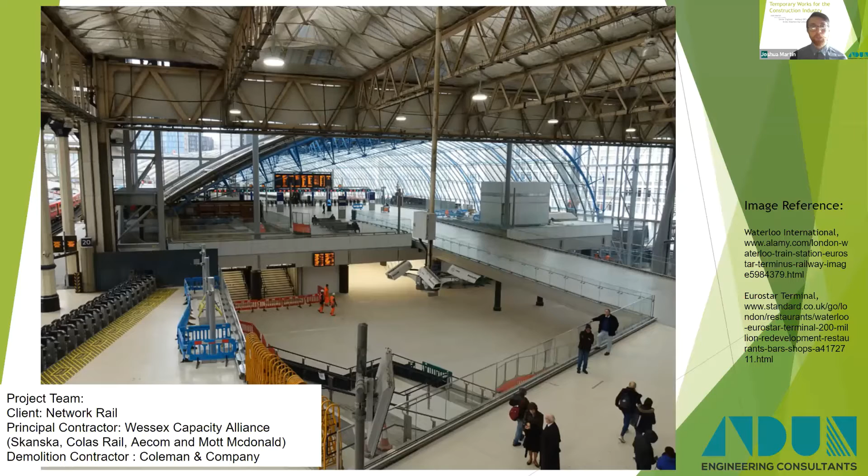The main package of works at Waterloo was in the removal of a large steel truss bridge, which you can see in this photo here, which was taken during the middle of the project, really. And also the demolition of the track support structure that was behind. The aim of the scheme was to remove the structure that used to serve the long Eurostar trains, now that the Eurostar had been moved to St Pancras Station. So effectively the platforms that are very long that you can see going off into the distance under that archway

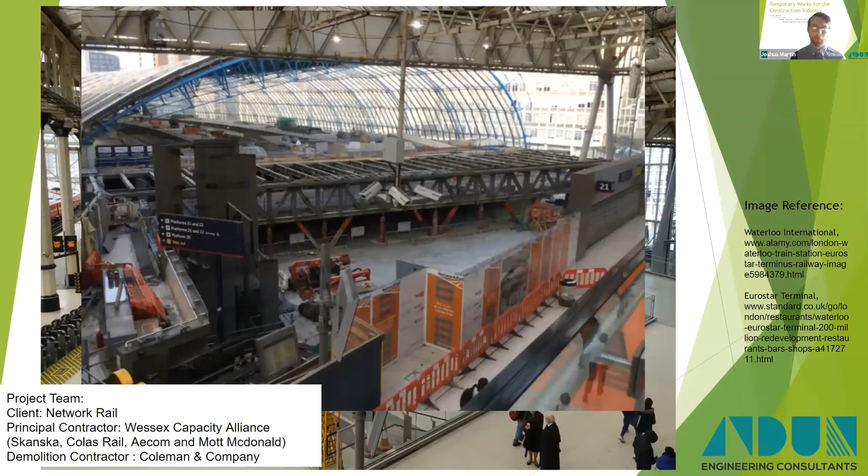could be shortened. It included the removal of around 2,000 tonnes of concrete over about a 15-month programme, all carried out within a live station over the top of the station's underground station. The Bakerloo ticket hall was just under departures level, which is directly under those props that you can see under the front truss. The package was completed on time and with zero RIDDORs.

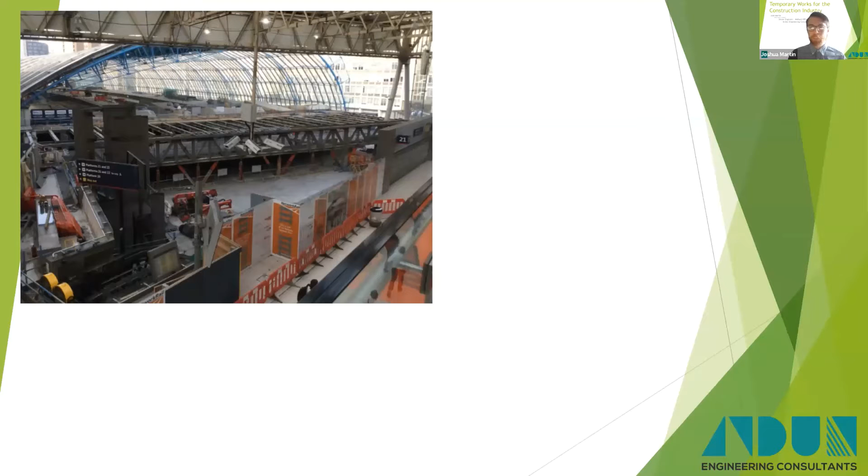So the first task was the bridge. First propping was installed to the bottom chord of the front truss, which you can see on that photo there. This enabled the truss to be dismantled, but more cleverly allowed plant to operate on top of the deck, as opposed to operating on top of departures level, which was directly above the live Bakerloo ticket hall. This ticket hall was a key risk that influenced a number of the demolition methods and thus the temporary works on the job.

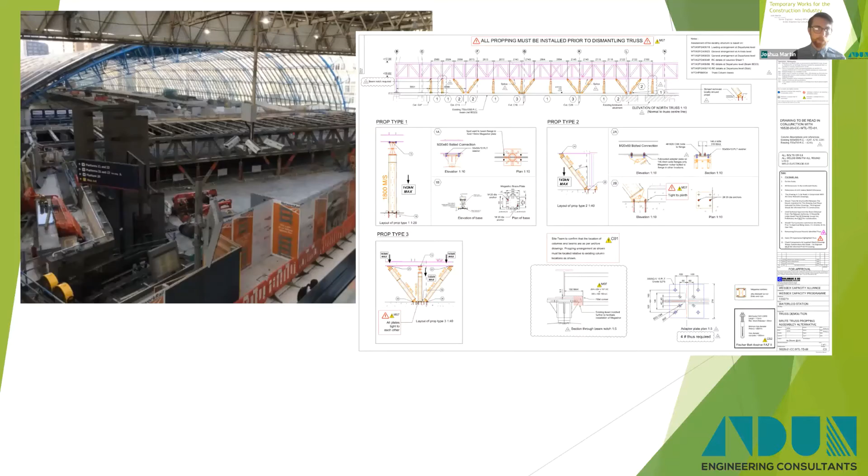All the risks were communicated to the contractor via drawings, a bit like this one, which shows the mega shore, and step-by-step sequences were provided as well, just so that we could communicate the exact step-by-step sequence of how we envisaged the structure would be dismantled safely. These designs were produced collaboratively with the demolition contractor and the principal contractor. I made the effort to share concept design work as design progressed to ensure that the most efficient design was implemented and was constructible.

As I say, I was the lead designer, but I was also based on site for a section of the work, which provided a close relationship between designer and the contractor, which meant for a very efficient design process and a very clean communication line. I could also just pop out and have a look at something which I was possibly struggling to find through photos and archive drawings. I could just go out and have a look at it with my own eyes.

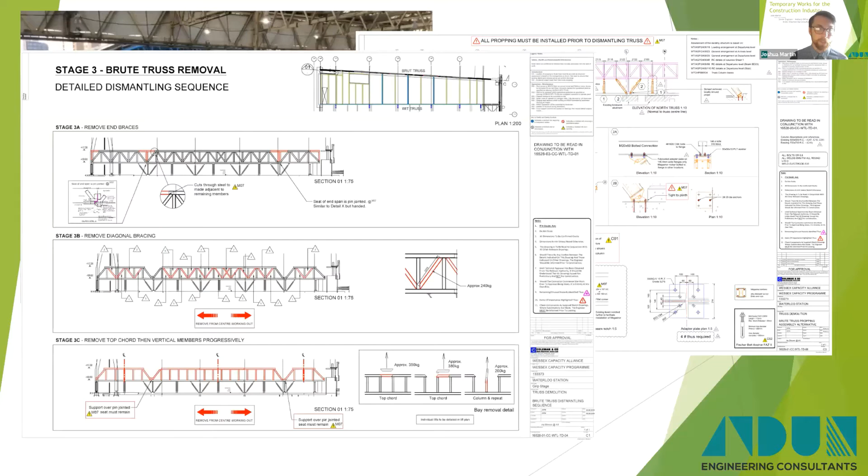The propping sequence was all modelled in a frame analysis software, removing sections of the chord as shown on this sequence bit by bit, element by element, to check the stability during demolition. And we produced these drawings so that they could have a clear understanding of how we thought that the whole structure could be removed safely. So this is a photo of the front truss removed, propped down to elevated structure.

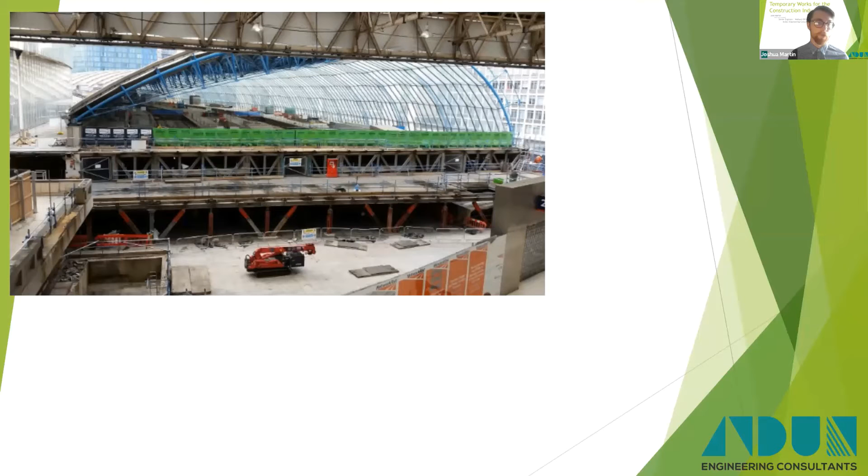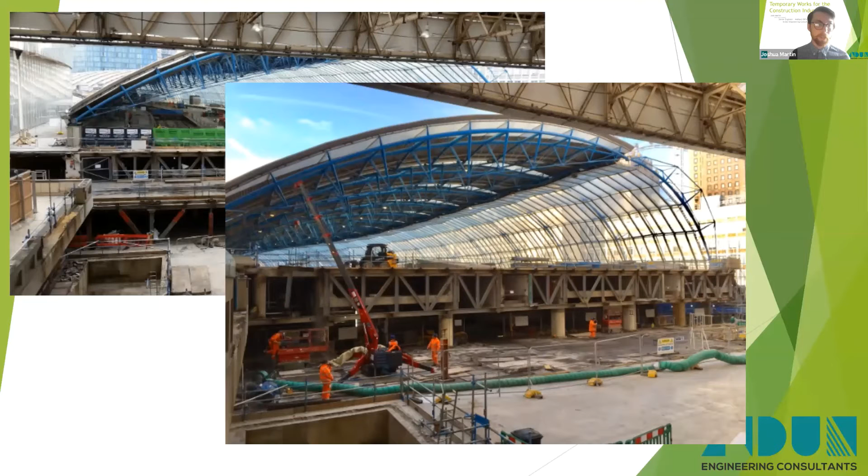The next step was to sit a Brokk 260 demolition machine on top of the deck that you can see there, and remove the slabs working from one end to the other. This mitigated the vibration going down into the level that acted as a ceiling to the Bakerloo ticket hall. And then once that deck was gone and propping removed, then it was the case of removing a truss that was pinned to the track support structure. That was carried out using a spider crane operating on departures level, which was justified putting mats down underneath the legs of the spider crane and justifying the loadings into that slab.

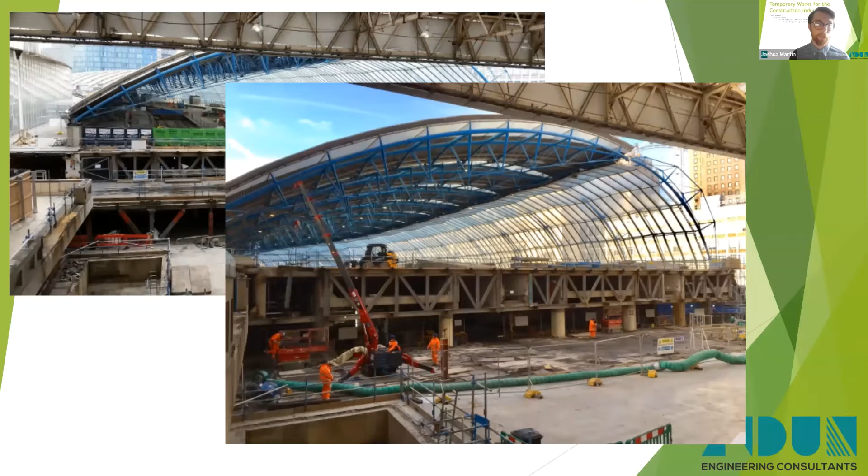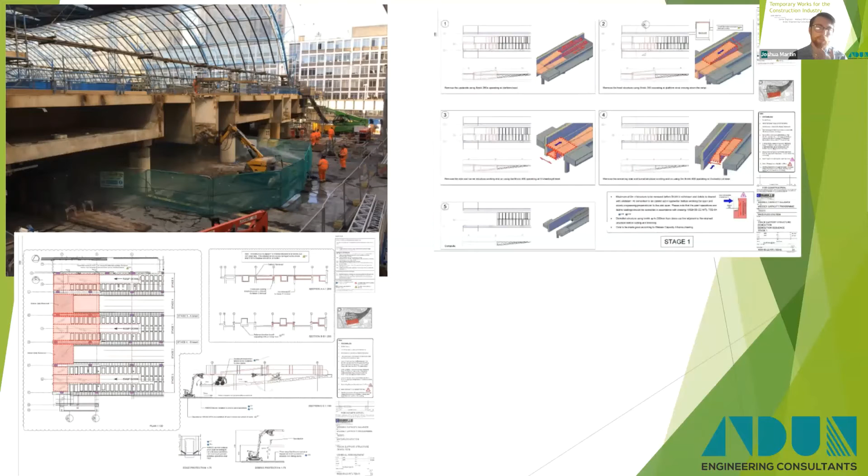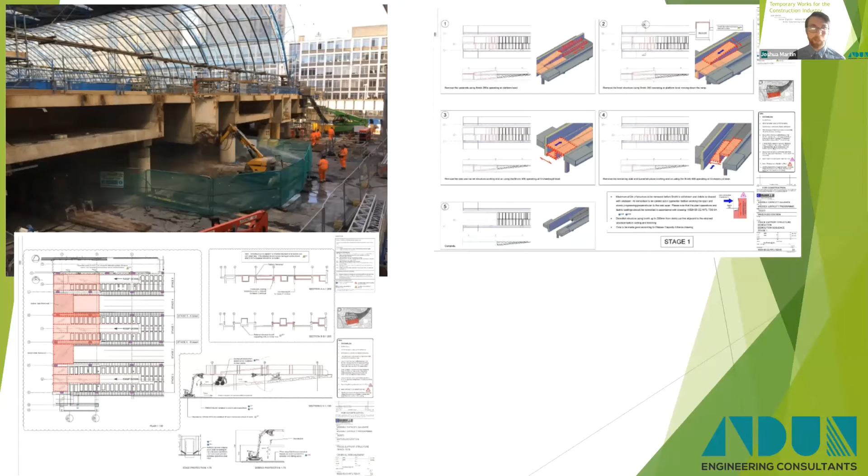And this image here shows some of that sequencing of the track support structure being removed. Now, the track support structure was essentially 2 stories above basement level, and it carried trains, Eurostar trains. The demolition was incredibly hard going. You can see from this photo how heavily reinforced that structure is.

The crusher, that's a Brokk 400 machine, sometimes had to go with the cracker attachment twice in one spot just to crack the concrete. It was hard going and slow work. The Brokk, if you're not familiar with a Brokk, that's a robotic demolition machine, which is remote controlled. You see the little chap on the right hand side of the picture at the bottom.

So he's got a remote control there, and it's linked up to the Brokk with an armoured cable, so he can be removed from the hazardous area where the demolition is being carried out. And also it gives him a different perspective of the demolition as well. He can walk around and look at it from a different perspective from a bloke in a cab would do.

When this Brokk was attacking this track support structure, you could see the hoses pulsating as the thing squeezed and cracked the concrete, because it was incredibly slow going work. And you may think, why use the pulverizer, the cracker? Well, this was because the peckers or hammers, which would have been quicker, were just too noisy to use in the day, because we were sharing the space with the operational Waterloo railway station, so we didn't want to disturb the rail passengers on their commute.

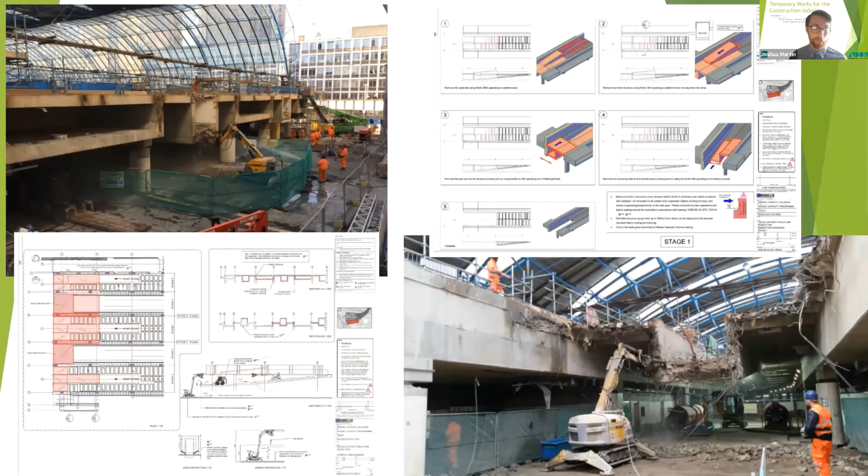All designs were produced with 3D sequencing, just to demonstrate what we expected the sequence had to be for the critical works which were required for the structural stability. And the designs were also Cat 3 checked because of the proximity to the railway lines. So once the slabs and some of the ramps that used to go down from the platforms onto that truss bridge structure had been removed, the next stage was to remove some primary beams.

Now, I'm getting a little pointer out here. So the slabs in the centre have been removed, and you'll see some of these primary beams being removed. These purple splodges are column points, and the permanent works proposal required us to remove the primary beams past these column points, but still keeping a lot of the beam intact. So this required some interesting propping work, especially because the raised track support structure did not line up with the structure underneath, very frustratingly.

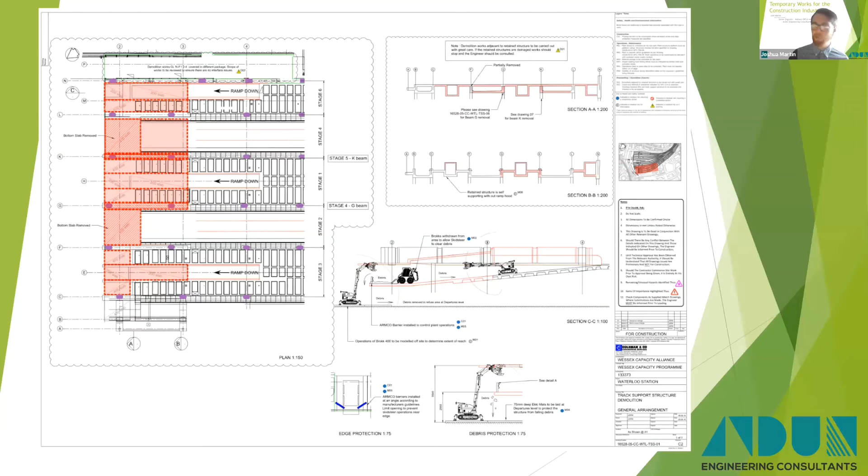So we had to prop back to strong points in the structure, which you can see on this drawing here. And that meant that we had to put in some triangular frames propped back down to big thick masonry piers which were in the basement. So this interesting propping scheme was implemented to support the permanent works proposal.

The driver behind, which you can see on the drawing, is that red hatched area directly above the column. The driver behind the permanent works design, and therefore the demolition scope, was because post-fixing rebar to the existing structure did not give the guarantee of 120-year design life, because resin hasn't been about that long. Therefore, the structure was hydro-demolished to allow rebar insertion and then recast. This added a significant risk to the project and significantly increased the temporary works required.

We designed the propping to go back to the strong points. And also the propping had to take into account that we didn't want the primary beam to deflect at all, for when they would recast after. So there were significant loadings involved, with preloads as well. Some of these frames took loads in excess of 100 tons.

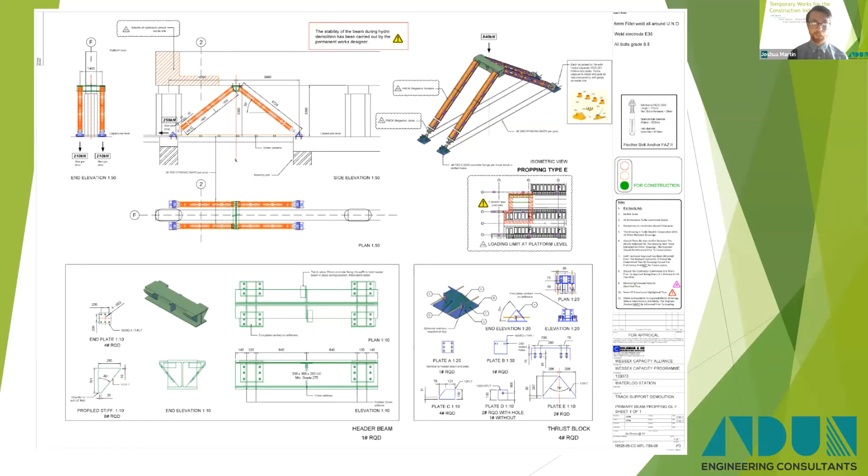But they had to hydro demolish, and hydro demolition is basically the most powerful jet wash that you've ever seen, blasting away all the concrete and leaving the rebar mesh behind. It's an incredibly noisy activity, carried out in the little shroud that you can see at the top there, because it's so noisy and messy, with a lot of water runoff. They're effectively taking out the support for this beam, which spanned about 12 meters, 1.8 meters deep, 600 wide. So they were very high loads.

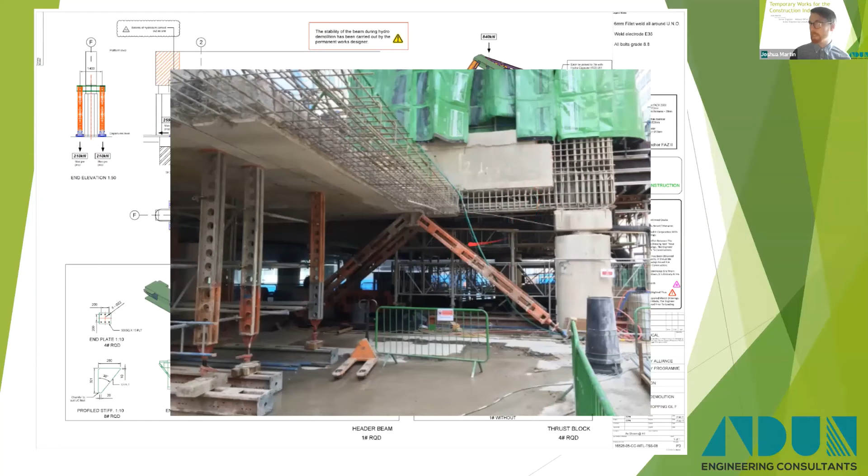And most of the primary beams had this scheme. Some of it was value engineered. This is the other side. You can see there the props down the bottom, and it was quite high risk, but it was the most practical way to deal with a beam like this.

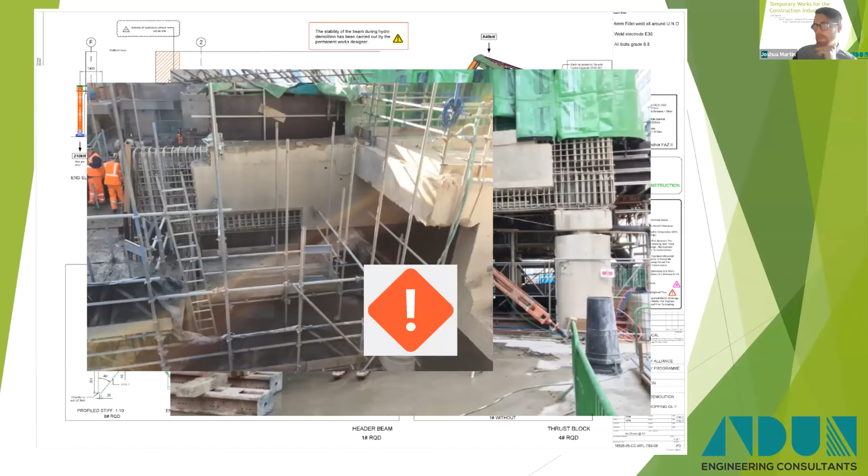There were some other areas which were value engineered and taken out, so this was one of them. The green hatching that you can see there was what they had to hydro demolish, and that pretty much went to the mid span of the beam. We developed some concept ideas of how to prop this and support it without the whole beam coming crashing down.

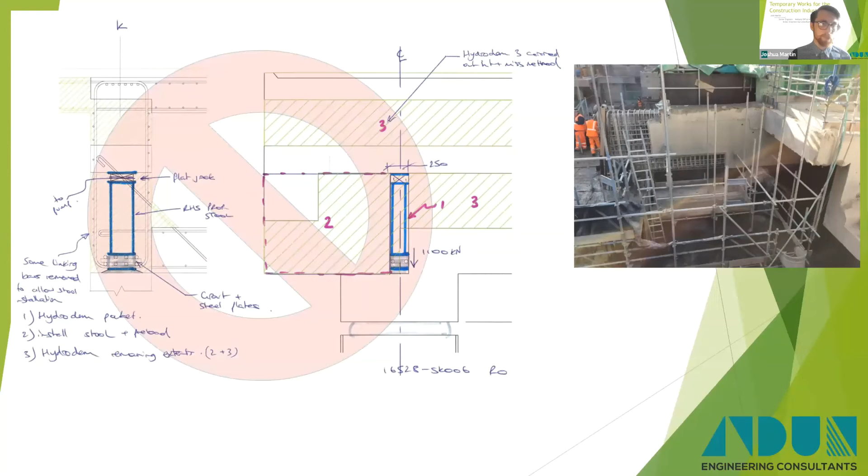Essentially, we produced a risk assessment, and I sat down with the demolition contractor and the principal contractor, and we just said, no, it's too risky. It's fraught with risk. It's very difficult to deal with the loads that we've got there. We might as well just take the whole beam back to the next column and then construct it from there.

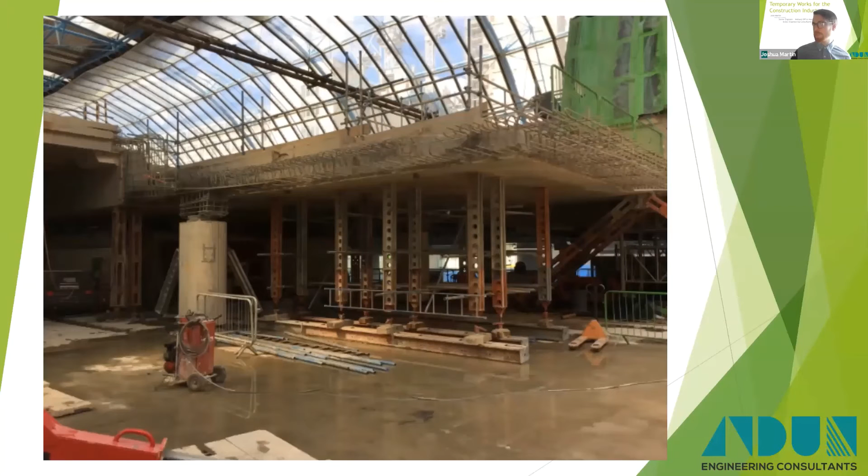Here's another photo of some of the slab propping, and then another area where they've hydro demolished above a column. The propping behind this column was a bit simpler because we had handily a nice big masonry pier below, so we didn't have to have a triangular frame.

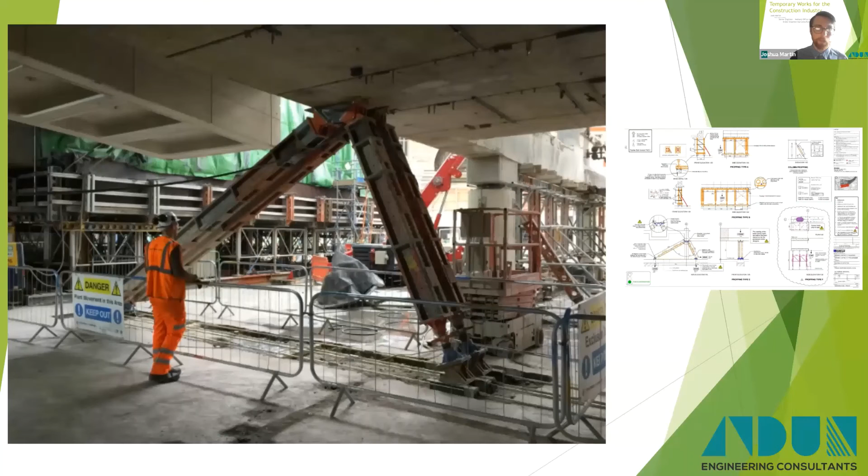The propping was drawn up, and we controlled the quality of the propping. I inspected it on site. That's one of my photos when I went around and inspected it, and also controlled the design by issuing the designs in draft for comment and checking, and then also issuing with a for construction stamp at the bottom, as you can see on the bottom left hand side of that drawing, just to show that the design has been checked and it's for construction, so it can be built on site.

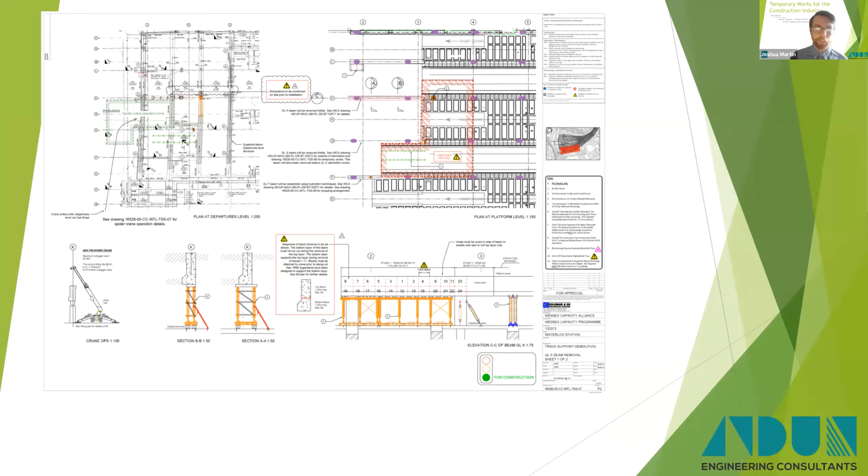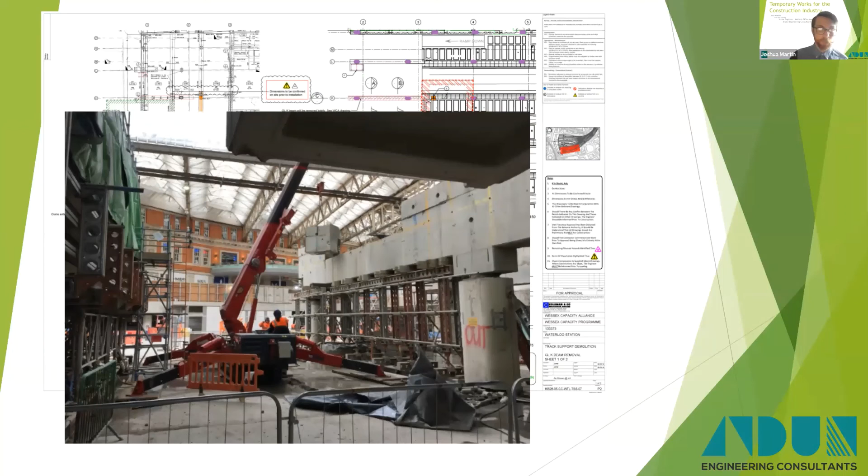This is some removal of other areas, which was carried out in quieter methods of demolition. No hammers, no breakers or hydro demolition. It was cut and lift using a spider crane. This is one of the primary beams that was being taken right back to one of the column points. So we propped the beam and removed it in sections using a spider crane. This was carried out during the day whilst the station was open, and it's a much quieter and controlled method of removing that primary beam structure there.

Here's another photo showing some of the other areas of work while that primary beam was being removed. You can see there's some raking props to column points there to make sure that the columns, once their head restraint had been removed, once the primary beam had been removed, we put some raking props in there to ensure they remain stable for when the permanent works structure was installed.

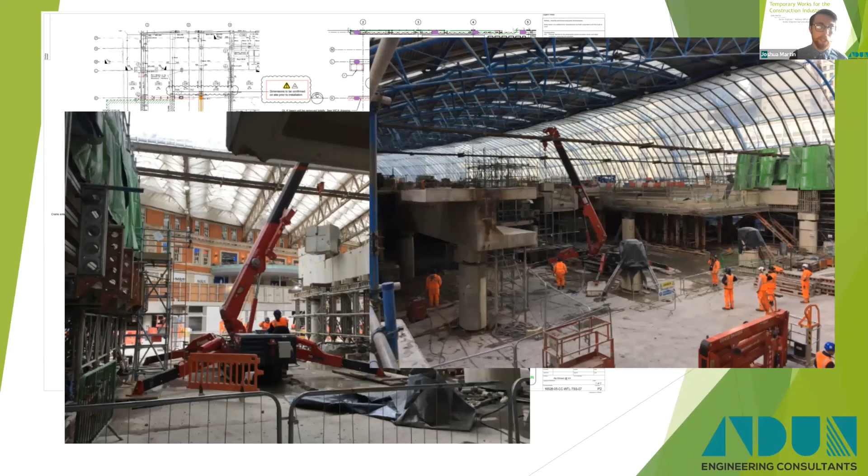Plenty of scaffolds and things going on, so we had to control the loading of the slab to make sure that the loads that we are having from the props, spider cranes, any plant and the scaffold was controlled and within the capacity of the elevated structure. So the job was completed in summer of 2018, and also won the award at the World Demolition Summit for the job in the civils job category.

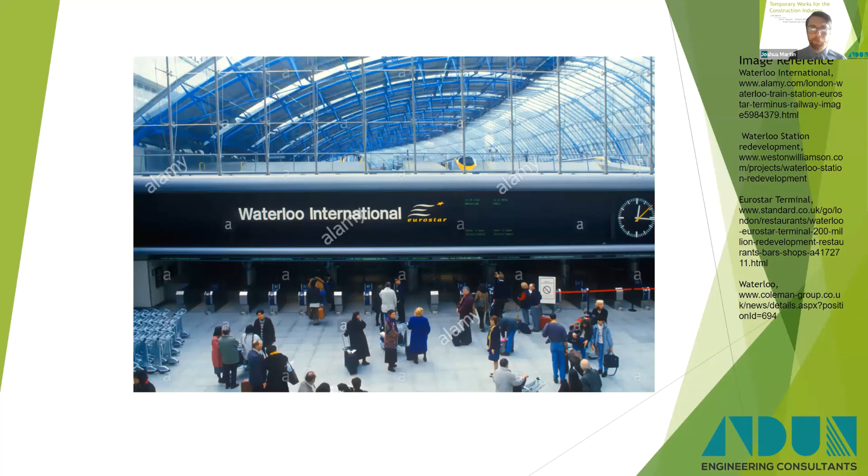There were several ways in which we reduced risk by design during this project. Collaboration being a key one, collaborating of all parties involved, the designers, the demolition contractors and the principal contractor, working jointly on the project to explore the methods and eliminate or reduce the risk where they can't be eliminated. All work that was carried out was Cat 3 checked, and we worked closely with the demolition contractor, principal contractor, as well as Network Rail. Works adjacent to the live railway were submitted as part of the Form 2.3 procedure.

The designer being based on site, that was very handy, and it meant that I had a very close, intimate relationship with the site team and the structure as well, which did help through the design process. Draft issued drawings to the contractor, Coleman's and Skanska, mainly the principal contractor, so that the design of the demolition was based on a collaborative approach and eliminating risks, which was absolutely key to a successful project, in my opinion.